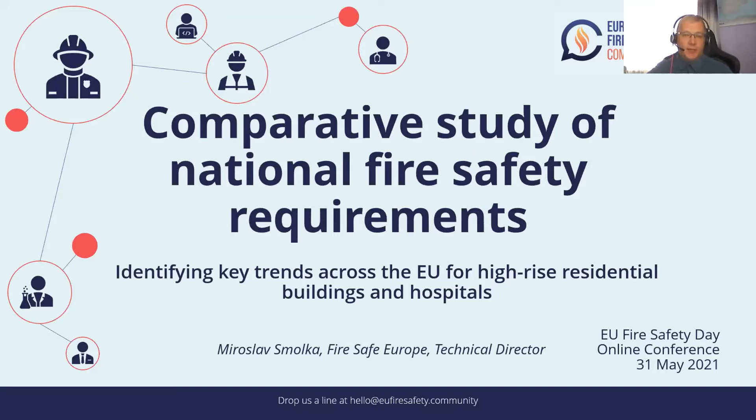And then we decided also to use a broader community. So Fire Safe Europe is an association based in Brussels, but it's much more than that. We also opened an open forum community, which has more than 650 members now. It's open forum, so you can participate if you like. You're all welcome to participate. And it's a forum to learn from each other, to bridge the gap between European countries, between different kinds of expertise that we may have, and join the forces to bring fire safety at the next level in Europe.

So Fire Safe Europe was established by companies to raise the awareness of fire safety in Europe in general. We cover a couple of sectors like cables, concrete, insulation, firefighting, fire research, flame retardants, and roof and wall systems. And the community is a growing area where we have more and more experts from different expertise.

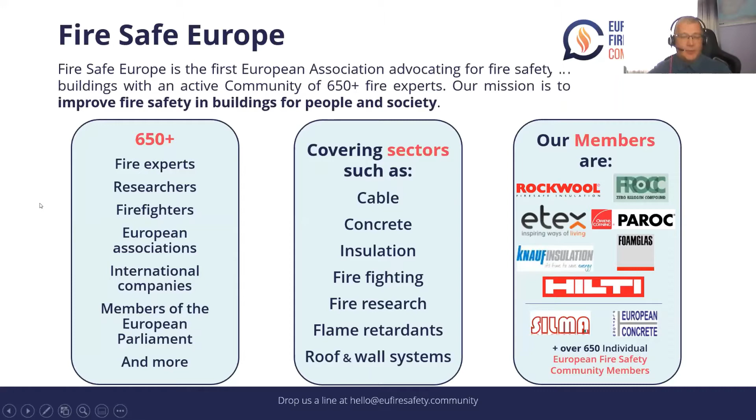So about these comparative studies, this idea, as I said before, was actually around for quite some time. We started with comparing European regulations. This was a very tough exercise, so we decided to focus on a couple of specific building types. In 2014, we started the project, and we did comparisons, which ended up in an Interflam paper, which caught some attraction. That's why we decided to open this subject to the community and to actually ask people from different member states to give us information about what kind of regulations do you have in your countries about particular building types.

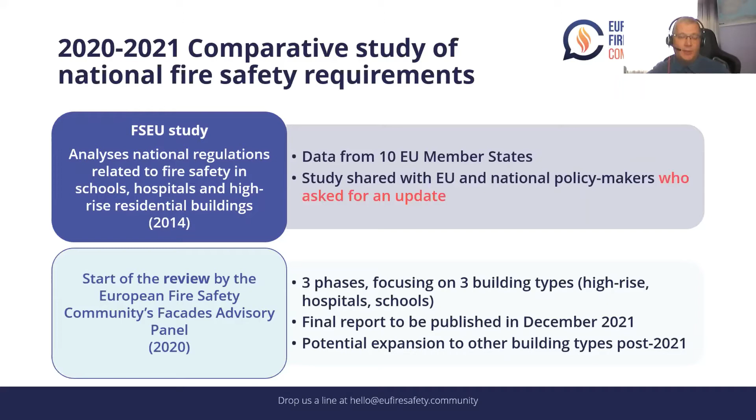And today I'm going to show you results about two types of buildings. I'll show you later that now we are also conducting a survey on a third building type, which is schools. But now I'm going to focus on hospitals, but I simply cannot avoid comparing our findings with the high-rise buildings, which was the first part of the study.

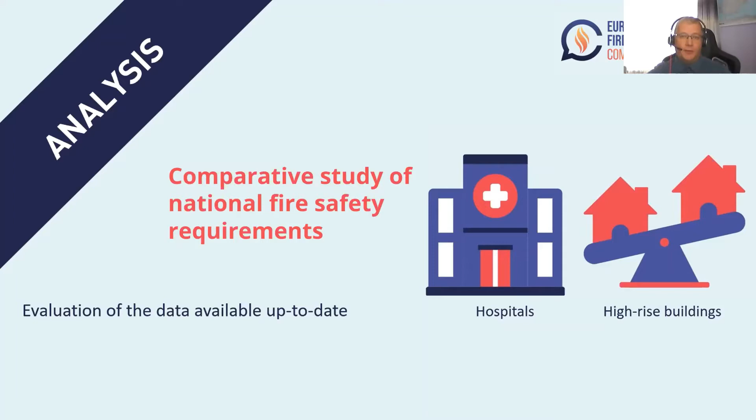Maybe I can say before I go deeper into this analysis that these are living documents. These are of course subject to revisions, and we welcome all kinds of input anytime. So regarding hospitals, we have something like inputs from 20 countries, including Croatia, also from some people who are present as panelists, so from other countries in this conference. As you can see, this is not limited to European Union. We really aim to cover all Europe.

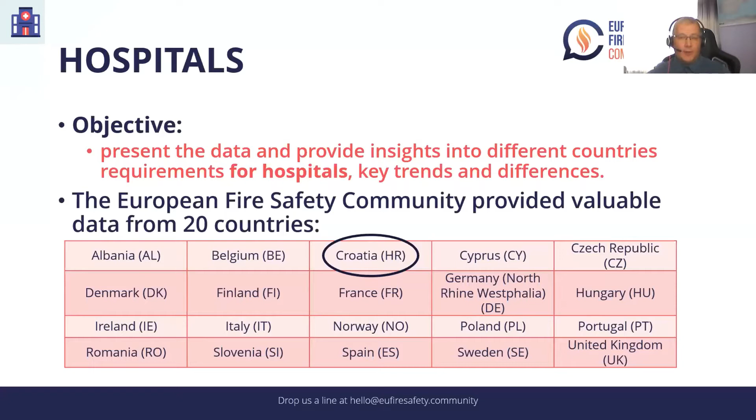To make this task a little bit manageable, we decided to use a specific example of a hospital. In this case, what we are now evaluating is the hospital building with 8 floors, a basement, 35 meters in total height, 10,000 square meters ground area, 1,000 beds. And the building is located in a city with 3 kilometers to the nearest fire station. Of course, we could end up with a quite different analysis with different building types, but this is what we consider to be a typical hospital that we can find across Europe.

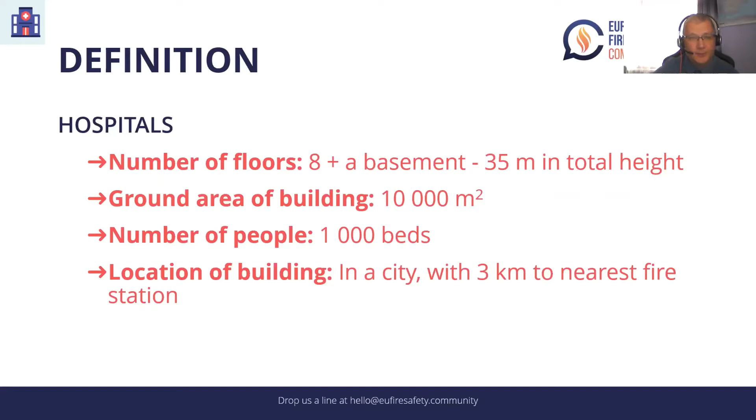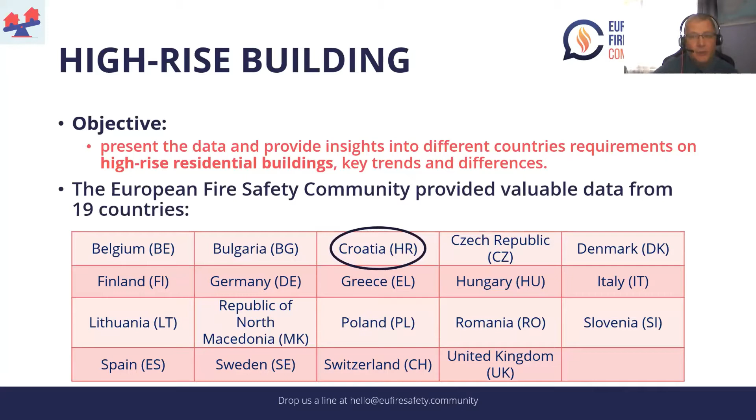If I compare this to the high-rise building exercise and comparison, we get a very similar number of countries responding to that. Of course, it's not covering all Europe, but I think it's quite a significant amount. So we have a similar basis for comparisons. And in this case, what we call high-rise residential building in our reports is a building with 15 floors, 2,000 square meter ground area, 17 apartments in each floor, and the building is also located in a city with 3 kilometers to the nearest fire station.

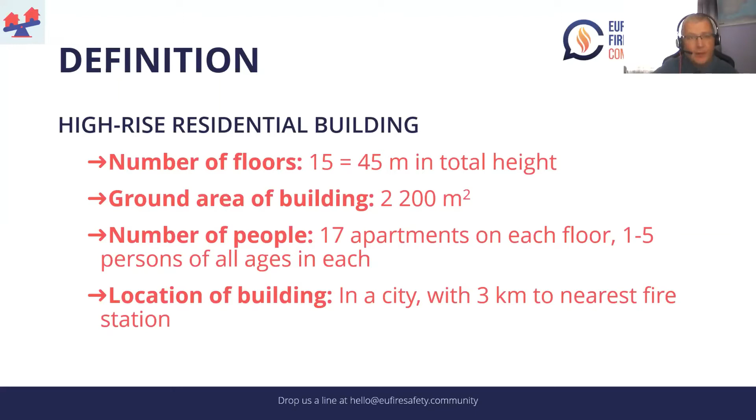Okay, and now let's go into analysis, and let's start with a question that was originally not part of the original survey to the member states and to the experts willing to contribute to the community. We try to investigate from the analysis of the questions we received if European countries have specific regulations for hospitals or not. And looking at the answers, we can see that there can be 3 or 4 possible approaches. So you can see that some countries have dedicated fire safety regulations for healthcare facilities.

In some countries, you see additions to fire safety regulations for healthcare added to general ones. Other countries treat hospitals as part of high-risk building assessments, and some give basically the same results as for high-rise buildings. Then, of course, you have a full spectrum of potential approaches in between.

Now, coming to the real analysis of the data we have, we asked community members a series of questions, also getting the background on the source of their information. I put three questions on a single slide to show the comparison, or potential balance, between different measures to cover a risk.

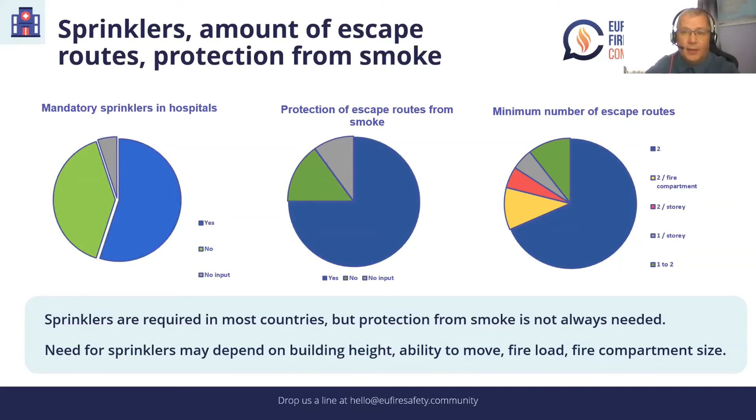It's interesting to compare this to high-rise residential buildings, where only about 20% of countries require sprinklers as mandatory. One-third of countries allow only one escape route in high-rise buildings, but this one escape route must be almost universally protected from smoke, usually through smoke ventilation or smoke pressurization. This shows the different risks and different approaches to mitigating them in these two building types.

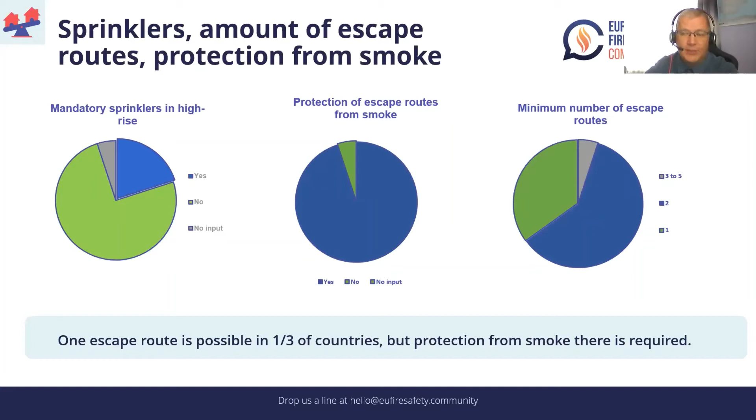Maximum distance to escape routes was another question in our survey. You can see two columns for each country, representing minimum and maximum values. As you can imagine, this distance can depend on a number of parameters—sometimes longer distances are allowed if you have more than one escape route, or if the escape route is protected from smoke, or if it's sprinklered, or a combination of all these measures.

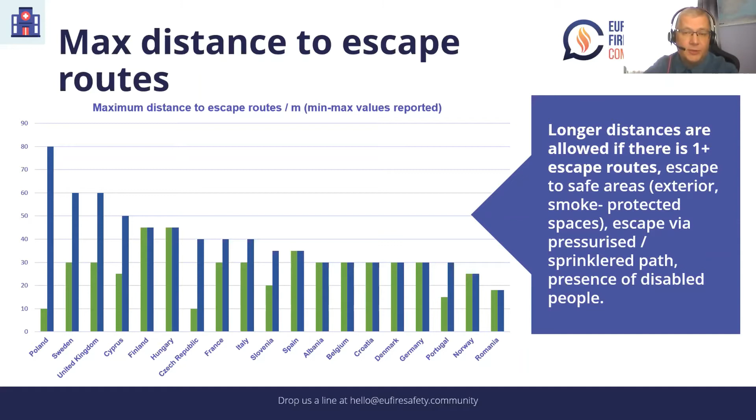Maximum distance to escape routes from a fire compartment—apart from one extreme, we see a quite similar range in high-rise buildings.

I may not have mentioned this, but you may have noticed the small logo in the top left—it points to the type of building we're talking about, whether hospitals or high-rise buildings.

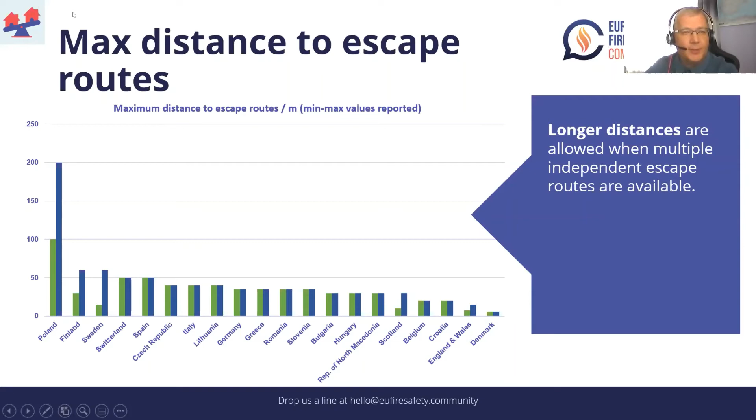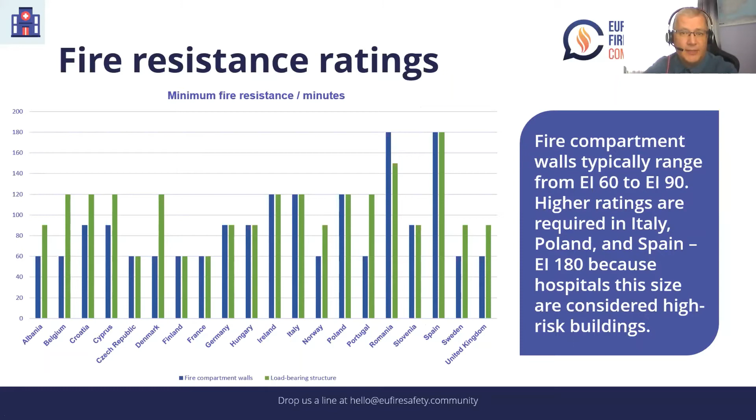In terms of fire resistance ratings used in buildings, the typical range is from 60 to 90 minutes. Higher ratings are required in Poland and Spain, because these buildings are considered high-risk. We see quite a similar picture in high-rise buildings, with some high requirements, but typically also in the 60 to 120 minute range.

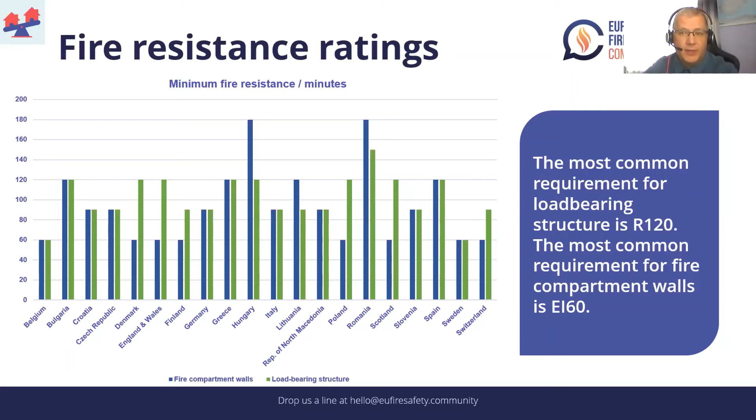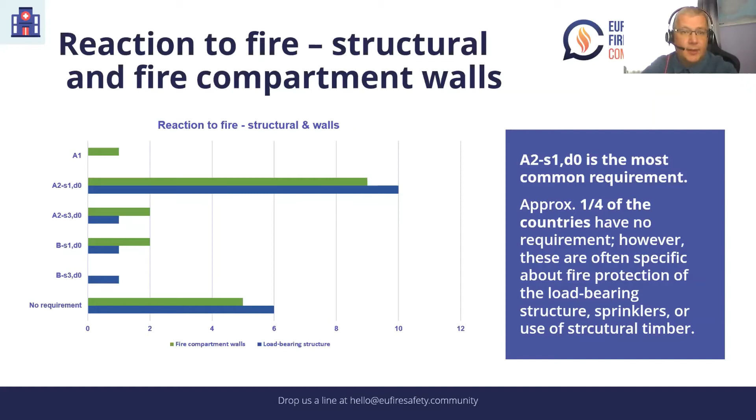In high-rise residential buildings, we also see A2, S1D0, and A1, meaning non-combustible load-bearing structure and compartment walls are required. It's seldom you see other classes, but interestingly, no country reports having no requirement for high-rise buildings, whereas for hospitals, it was different.

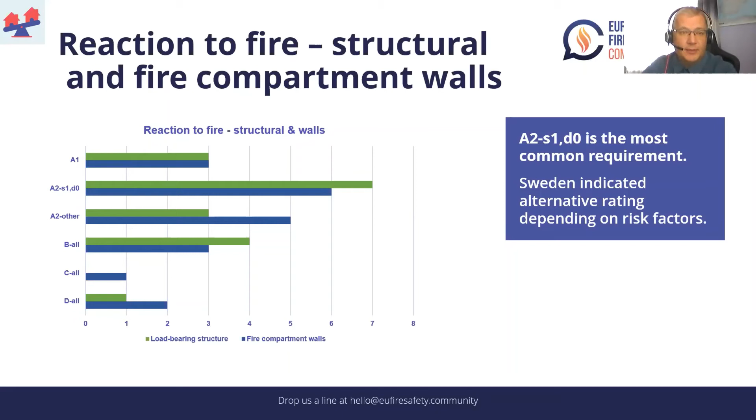This is an interesting overview of roofs, both in terms of roof coverings—like external exposure classification—and roof insulation requirements. You can see a full spectrum of answers; it's difficult to find a common denominator apart from B roof, one of four possible European classes, mentioned most often. Some European countries require external exposure classification, some require reaction to fire class, and some even indicated flooring, which we assume was for parts of the roof where people can walk.

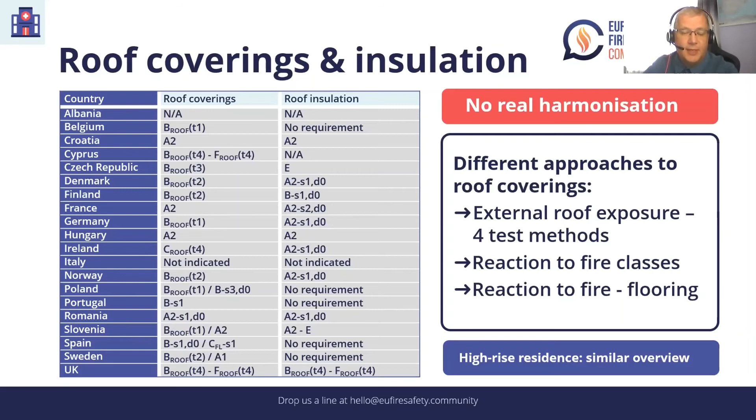For roof insulation, we see a similar picture—mostly non-combustible, but a lot of countries have no requirement here. I'm not showing this picture for high-rise residential buildings because it was basically the same or very similar overview.

External wall claddings. We have seen some examples of tragic fires where external claddings were involved. Quite interestingly, 1/4 of the countries didn't report any requirement for external wall cladding in hospital, and for countries which did require requirements, it was mostly A2, S1D0. It was never A1. I assume it's for practical reason, because it's very difficult to find products which would conform to this requirement. And what you can see is the overview of 3 different technologies.

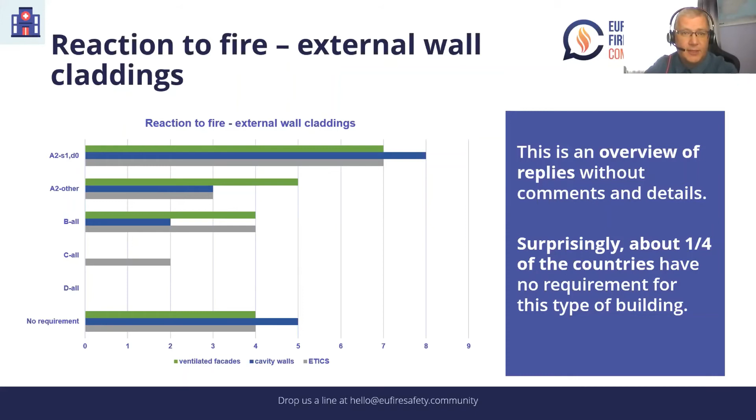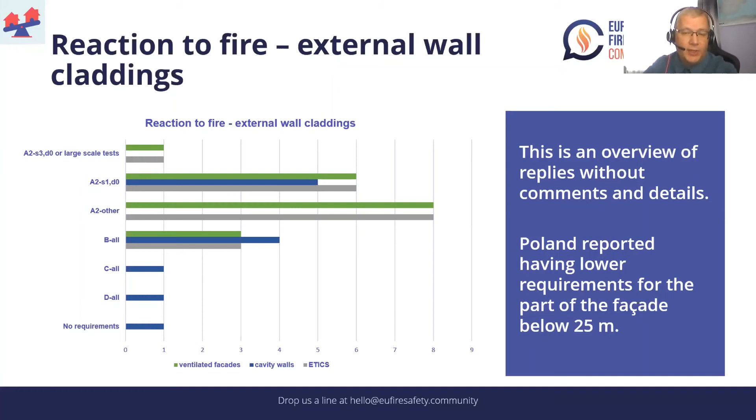It's for ventilated facades, cavity walls, and rendered facades. Just comparing this parameter to high-rise building, what is striking here is that only 1 country reports no requirement for this building type, and for the majority it's some sort of non-combustibility or limited combustibility, mostly in category A2, sometimes also B. Some countries in Eastern Europe, this was reported by Poland, have a special requirement that a certain height of the building must be non-combustible, meaning from a certain height above, but below you can have a different rating. But this is not universally seen elsewhere.

Another parameter was reaction to fire of wall and ceiling linings, and I put these two graphs on one slide because it shows an interesting comparison. In hospitals, for wall and ceiling linings, you don't see actually very big differences between escape routes, shown in green, and the general requirement for other types of premises in this building, shown in blue. In residential high-rise buildings, it's a bit different. Escape routes are protected more than in the apartments. But we don't see this split so much in hospitals.

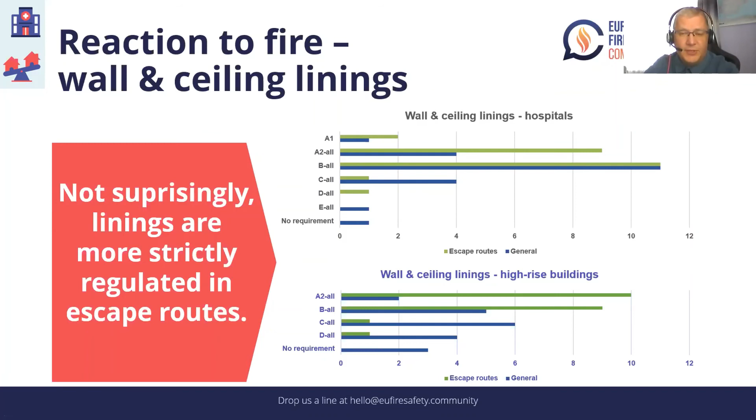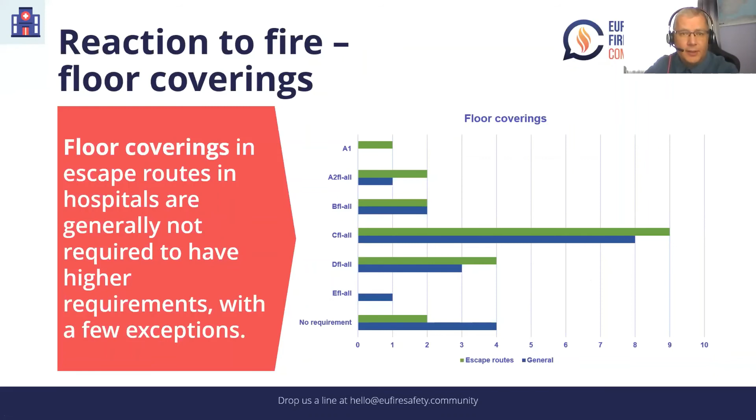And a similar picture is in floor coverings. In hospitals, floor coverings in general are not required to have high requirements, with some exceptions, of course. Typically we see class C here as a requirement. Whereas for high-rise buildings, we can see that floor coverings are more heavily regulated in escape routes, so with much more limited regulation in apartments.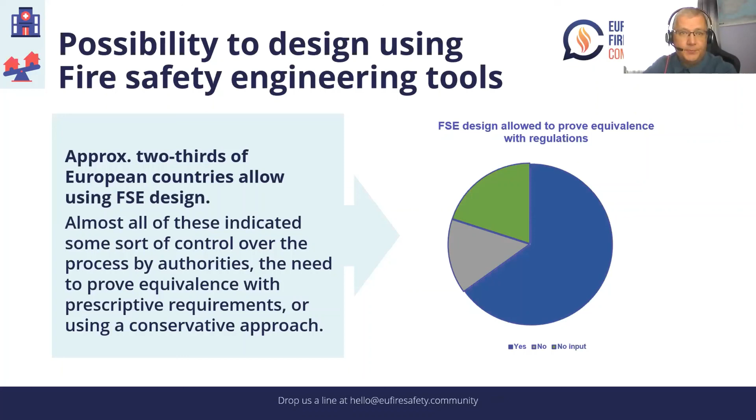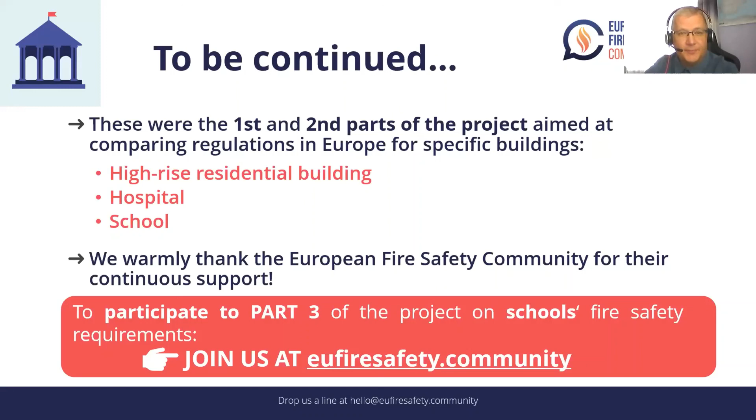As I said, this project is not yet over, it's a work in progress. Now we've launched a questionnaire, a survey on the community site about schools. So after we have these three building types covered, we'll have an overview of the situation in Europe for three building types. But we also assume that we will not get answers from every member state. That's why I strongly encourage you and invite you to participate in these efforts, because the output can only be as good as the inputs provided. So any kind of support or participation in this initiative is really appreciated, and thank you in advance for that. Thank you also to the people at this conference who provided very valuable input for hospitals and high-rise buildings. So that's all from my side.